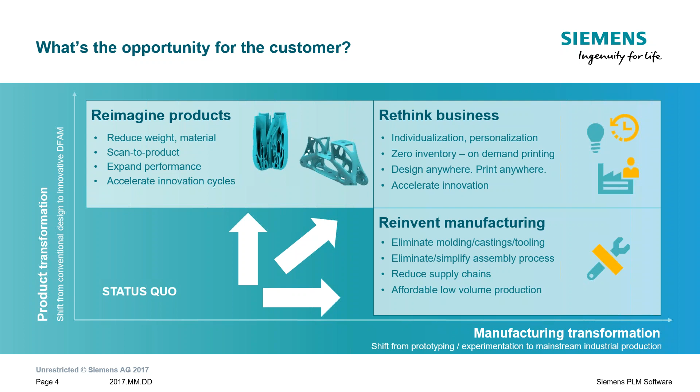So you really can take this thinking to multiple levels, and ultimately it helps your customers rethink the way that they do business. Our goal is to have them become more innovative, more productive. And I'd like to illustrate the benefits to rethinking by sharing a little story with you.

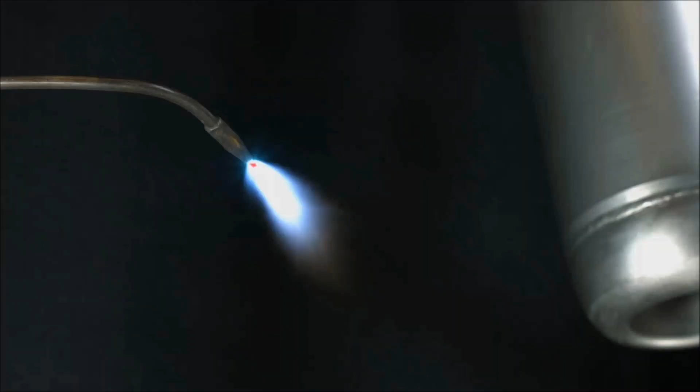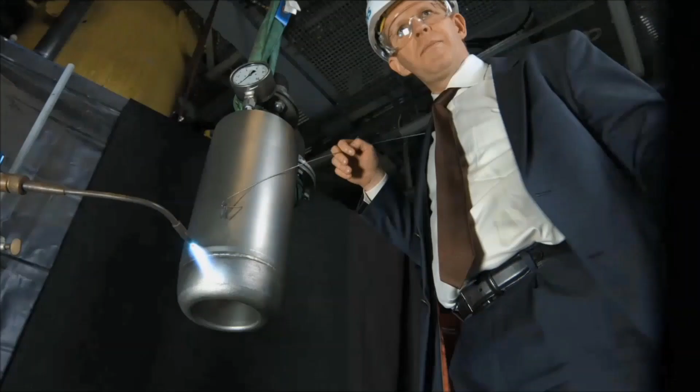So the goal of the project was to reimagine how they could redesign this high temperature burner system. This burner is used in a fuel refining process. It's a thermochemical conversion process that burns leftover messy reactants or fuel at extremely high temperatures to extract additional usable fuel from that sludge, so to speak.

The temperature in this combustion chamber is incredibly hot - over 1,300 degrees Celsius, which is actually higher than the melting temperature of the metals this part is made from. And you just saw from that video the incredible cooling efficiency this burner has, with the fact that it could be under extreme heat and be touched by the human hand without burning or impacting that person. So it's an incredibly efficient design. But the conventional way it was designed and manufactured has a lot of challenges and a lot of drawbacks.

The challenge was to figure out if there was a more elegant way that this burner tip could be redesigned that would reduce overall manufacturing effort, but do this while maintaining the functional performance. You can't lose any efficiencies in performance.

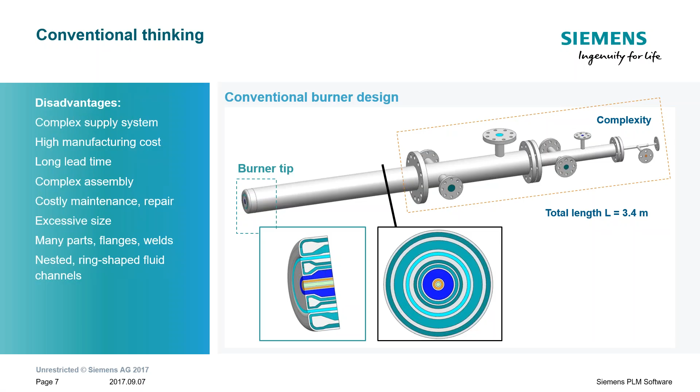So the aha moment to this whole challenge was when the engineers took a different approach. They used generative design and an additive manufacturing way of thinking to help inspire new ways that they could design this burner tip.

One of the great benefits to additive manufacturing is that it empowers engineers to think of new shapes, new radical forms that were never able to be manufactured using traditional methods. In fact, many of these radical ideas are not constrained by the human mind, but more by the existing manufacturing processes we have available. With additive manufacturing, there's a saying, however valid, that manufacturing complexity almost comes for free - which isn't exactly the case, and we'll talk about that in more detail.

The engineers at Siemens used a couple of different ways of thinking. They used the concept of biomimicry, looking toward nature to be inspired by what nature has done to solve problems, and then imagining how combining biomimicry and additive manufacturing might help them produce this part differently.

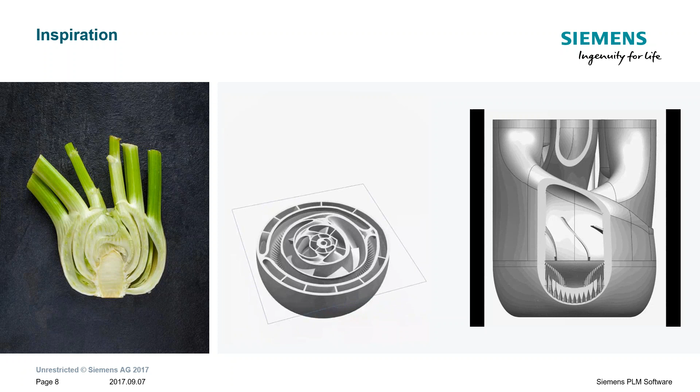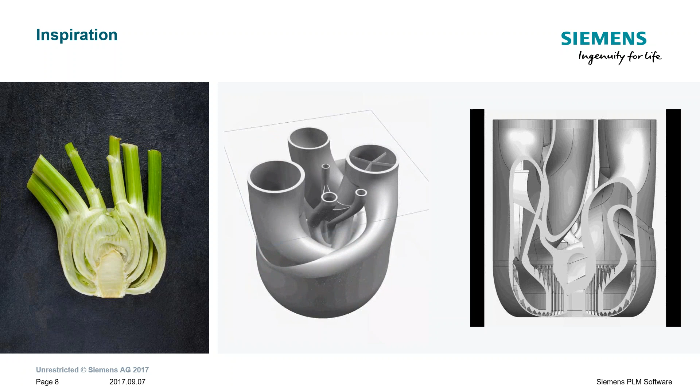The inspiration came from this fennel bulb. The engineers looked at it and said, this actually looks awfully similar to the current burner system we have today, with its complex network of connected tubes all coming together at the root of the bulb. Like many areas of design, inspiration can come in many forms, and this was just another great example.

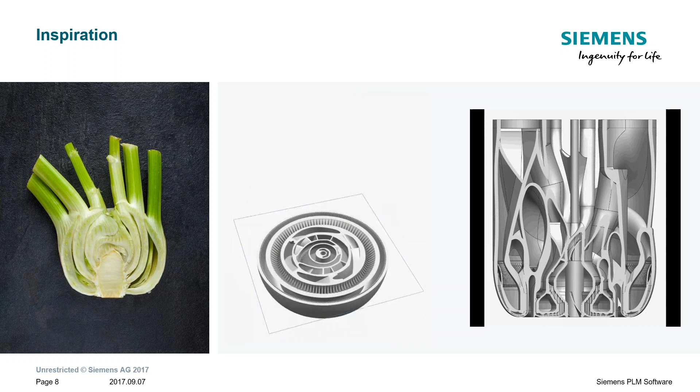The really awesome thing from my perspective was that this model was entirely designed in NX. It's a complex parametric model of this new concept. You can see from the cross section that the interior is quite complex, with a network of cooling channels to prevent this whole burner from melting.

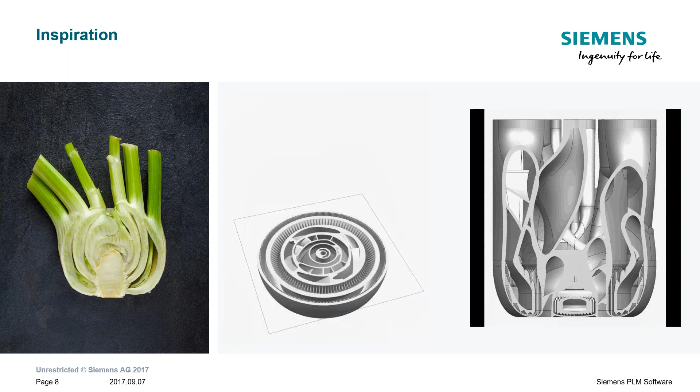The engineers were able to achieve this form - which often looks like an unimaginable form in reality in some cases - by letting computing algorithms do much of the work. This is where aspects of generative design come into play.

The way our Siemens division did this was they took a digital twin of the model, that parametric model in NX, and linked it into another Siemens product, STAR-CCM+, for computational fluid dynamics. Then they used another Siemens solution called HEEDS, which I like to equate to the conductor of an orchestra. It allows you to run through all sorts of parameter configurations in a design, exploring the design space of possibilities to figure out the best combination of parameter changes to achieve your desired result.

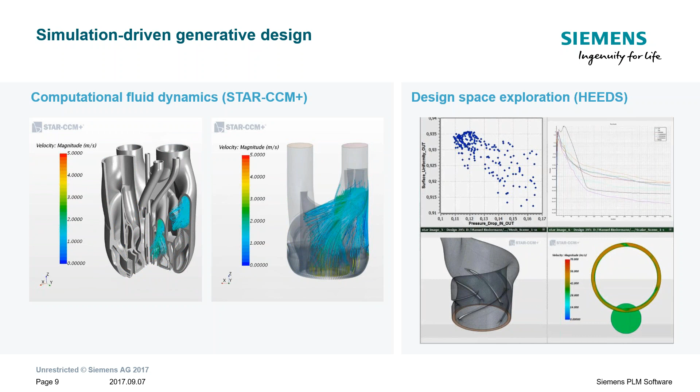So the result of the design challenge and what they were able to achieve was a significantly more elegant design. They took all the complexity of that system and transferred it directly into the tip of the burner, the 3D printed tip. So they took complexity out of 90% of the rest of the system and concentrated it into one spot.

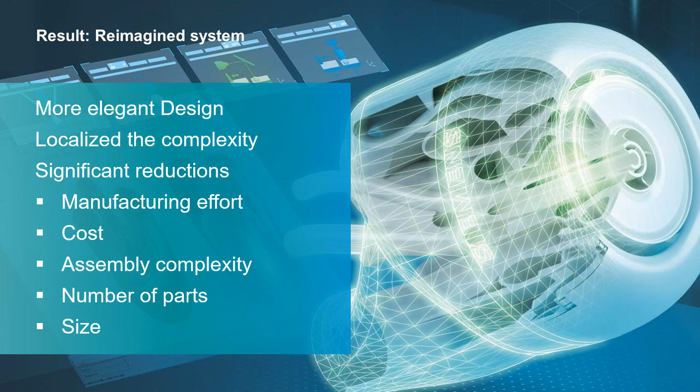By doing this, they were able to significantly reduce manufacturing effort, where again, all the complexity was put into the 3D burner tip. They had a significant reduction in assembly complexity, a reduction in the number of parts and the number of welds. They were even able to reduce the size of the part. So it's a fantastic example of rethinking design using generative thought processes and additive manufacturing thought processes that can really change the game for your customers.

You have no control process, so you have a workflow that's not controlled. You have no real PLM environment to take over and control that workflow for you. And then, as I mentioned, conventional thinking can often also get in the way. So what's Siemens doing about this?

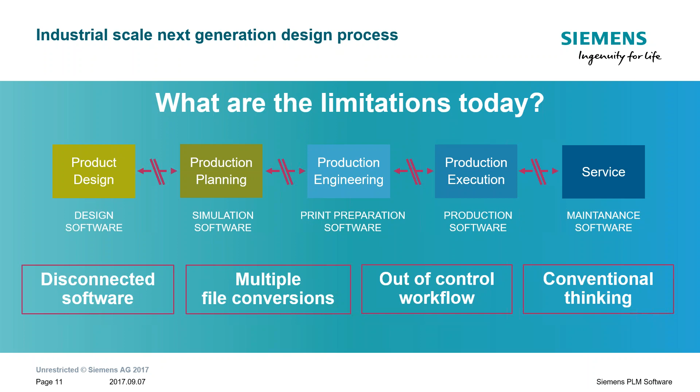Our strategy around solving this problem for you is that our vision is that we have this one integrated, industrial strength solution, from requirements-driven generative design all the way through to production, in this case 3D printing or using other manufacturing as well. And all of that is encompassed through our data and process management pipeline through Teamcenter.

I think ultimately this is very much aligned with the Siemens value proposition as a whole, our ability to bring a complete workflow solution to you in a single integrated platform and environment and way of working. So if you take a look at the products, and you've heard me mention at least a couple of them already, Siemens can bring to you a strong portfolio of all of the elements that you need to be able to pull this together.

And the value being that much, if not all, of these components are all sitting on the same software platform, which means you have levels of integration greater than you were ever able to achieve prior. So I'm going to go into the next few minutes talking in a bit more detail about each aspect of this, and hopefully give you a much better picture of how we can really help you bring all this together into one integrated end-to-end solution.

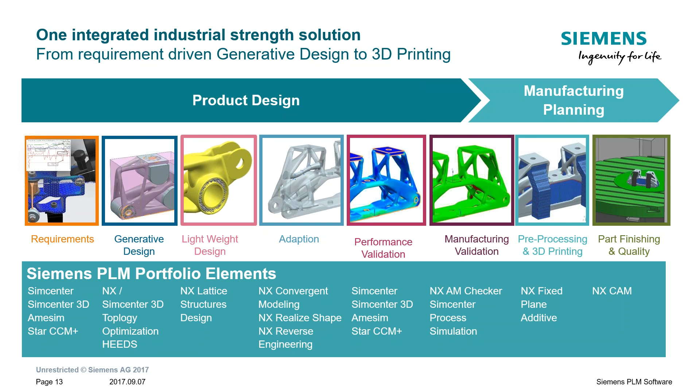And so I mentioned to you that system performance simulation can really drive the design optimization. Using simulation, we can really evaluate the performance of the system. We can capture the requirements all the way down to the component level.

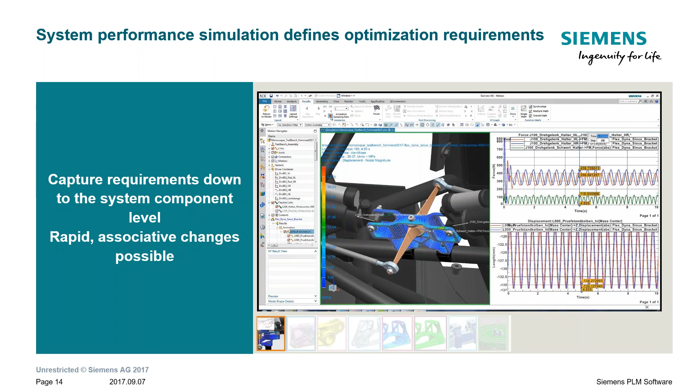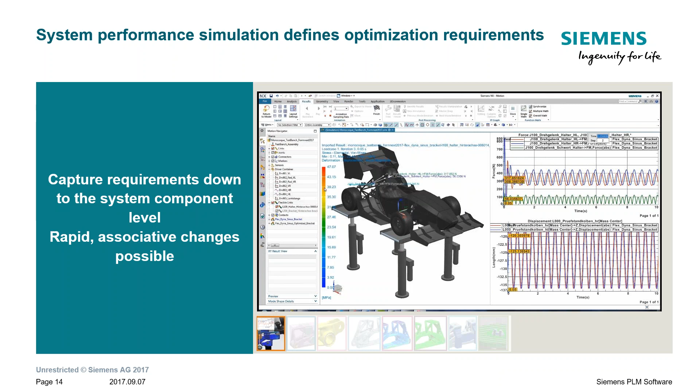These requirements can be all sorts of things. It can be material selections. It could be different system loads and constraints. You can feed into the simulation the design space availability, what kind of cost targets you want to achieve, and more. Then, using that combination of NX with SimCenter, you have a seamless integrated way to capture these requirements and then reuse them in an associative manner.

Those requirements that we capture through system performance simulation are then fed into an accurate design optimization, where now the function of the product is driving the design. Capabilities like topology optimization can be performed in a much more natural and intuitive way, in particular because we have this technology natively integrated in the NX design environment. So the designer can easily set up their design space, set up their loads and constraints. They can select their materials, including, and very importantly, their ability to optimize against desired manufacturing processes.

I've mentioned to you, and you see the underpinnings of additive manufacturing in this presentation as one of the optimization constraints that you can apply, but it's not synonymous only with additive manufacturing. Topology optimization can be leveraged and be of great benefit regardless of the manufacturing process you wish to apply to it. For example, we can have the optimization be constrained to a molding and casting manufacturing process, or we can constrain it to a machining or extrusion process.

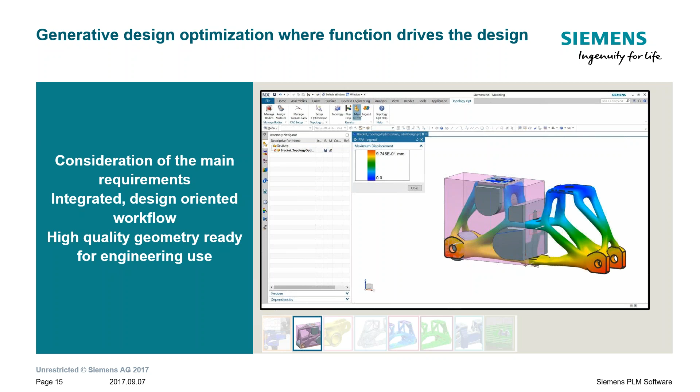So the fact that we can integrate not only geometric optimization of the optimum structural form, but also integrate manufacturing considerations into the optimization, is critical to you and very valuable to you.

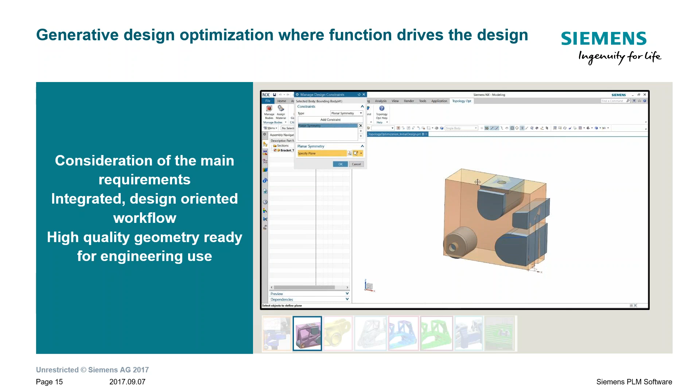One of the other benefits that additive manufacturing can bring is the opportunity for further lightweighting through integration of lattice structures into the design. Oftentimes lattice structures can help realize improved lightweighting while at least maintaining performance, but we've even found that we can improve performance through the integration of lattice structures.

Lattice structures themselves can be great tools to perform structural engineering on the part, beyond what topology optimization can do. By feeding information about the lattice structure itself into the optimization, it becomes possible for the generative algorithm to recommend areas in the design that could benefit from that additional lightweighting. So you see how all these pieces of technology can be seamlessly put together to get greater benefits.

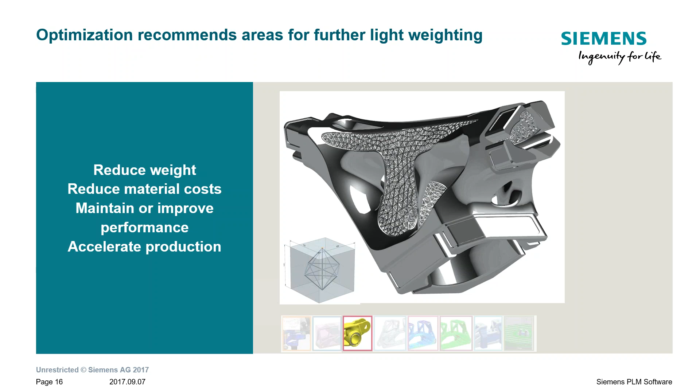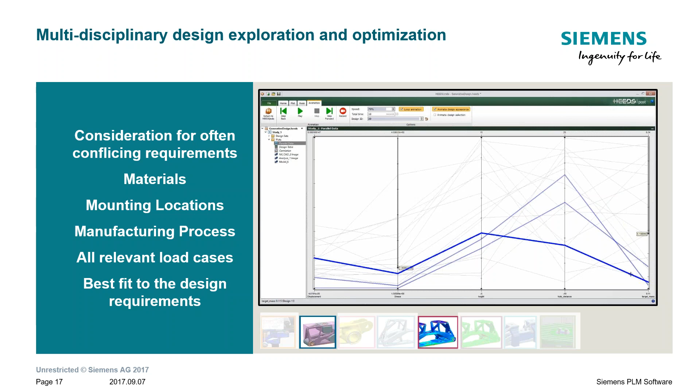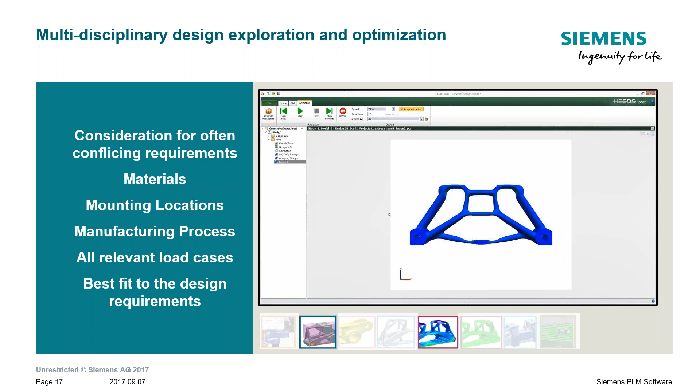As I mentioned, as the conductor of the orchestra, this all comes together, and our customers can realize the greatest benefit from generative design by taking a multidisciplinary approach to the problem, where all relevant load cases, material options, mounting positions, and manufacturing processes can be considered in that optimization. You're now allowing the computer to provide feedback on the best design options, so you can make an intelligent decision and down-select a solution that best meets different, often competing, design constraints. That's one of the biggest challenges in multidisciplinary optimization—constraints on the system can often compete with one another—so having a software solution that helps determine the best option is invaluable.

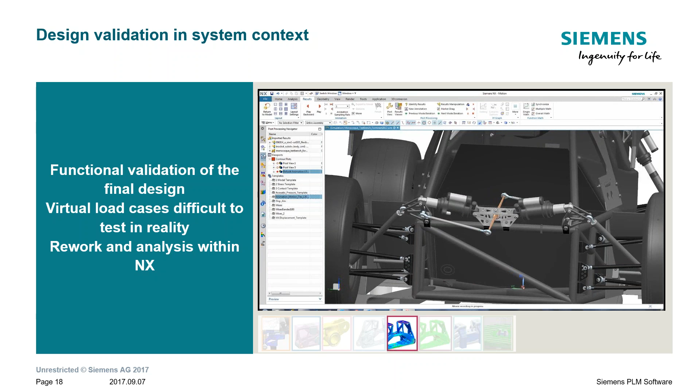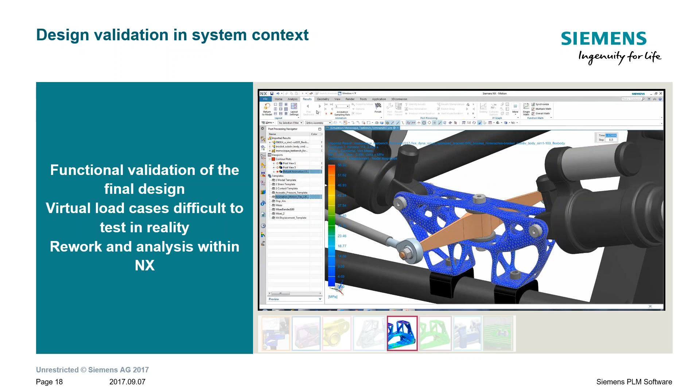Because NX is a multidisciplinary design platform, it becomes easy to feed the results of optimization back into simulation for further validation—considering many more load cases and validating that the design continues to meet the different requirements on the system. Within SimCenter, passing data directly within NX from CAD to simulation, you can evaluate those load cases and consider things beyond structural, such as thermal, fluid motion, acoustics, durability, and more.

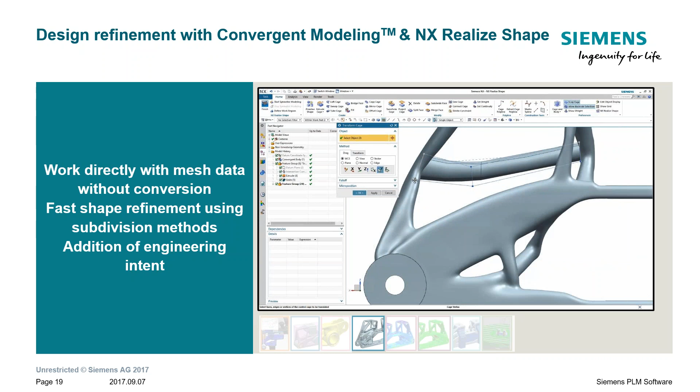At any state in the process, a designer using NX tools is able to easily refine the product form or even rework it using an extensive set of modeling capabilities. Tools such as Convergent Modeling allow working natively with mesh geometry without conversion—the key is that NX allows us to work with mesh geometry like any other geometry in a CAD system. Or using NX Realize Shape, our subdivision modeling tools, which makes it much easier to make changes to complex freeform shapes.

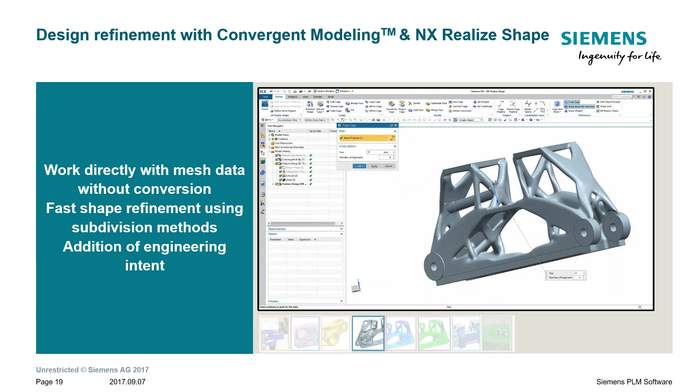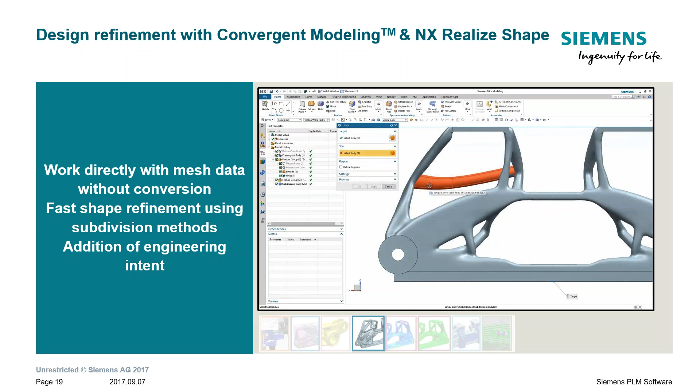You can also incorporate aspects of aesthetics, and much more easily prepare your models for additive manufacturing or other manufacturing methods, like mold design or other downstream uses. Having that core set of CAD modeling tools that NX provides is critical—the fact that you can take mesh geometry and evolve it immediately without extensive reverse engineering is critical, along with the breadth of CAD tools including subdivision modeling, synchronous modeling, and others to make design changes easily is a great benefit to you.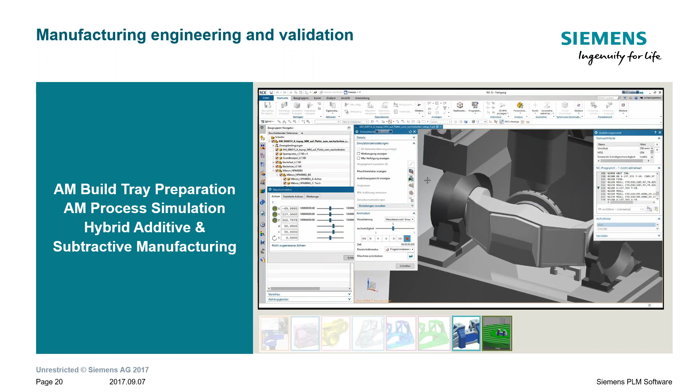I'm sorry, let's skip forward.

Siemens Generative Design Solution enables that next generation of product design, from design to production in a single platform. Our ability to use generative design processes, starting from the system requirements, using those requirements to explore the design space and optimize with a high degree of automation is invaluable. Critical to this is our ability to consider multidisciplinary requirements and our unique ability to get production-ready results with tools like Convergent Modeling and NX Realize Shape. And finally, our additive manufacturing thought processes and capabilities combined with generative design can offer even greater levels of efficiency and innovation.

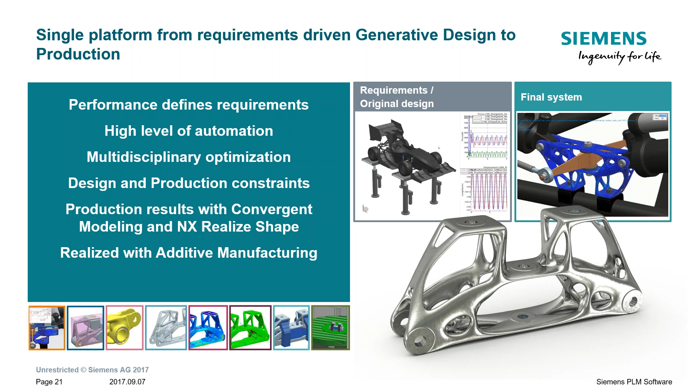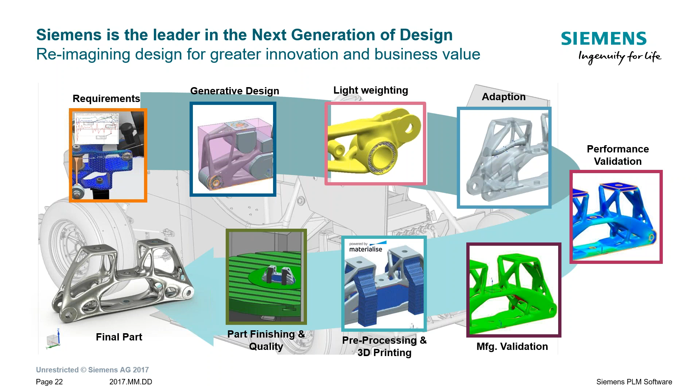So with that, I hope you see that Siemens, we view ourselves as a leader in what we call the next generation of design, which is all about helping our customers reimagine design for better innovation and business value. With that, thank you for taking the time to listen to this thought leadership session and get a picture of what Siemens can bring to the table and how we believe we can speed up and help you with greater innovation in your processes.

Awesome, great job, thank you so much Todd. Even I understood a lot of that, so I really appreciate that. Oh good, and yeah, it was a great presentation.